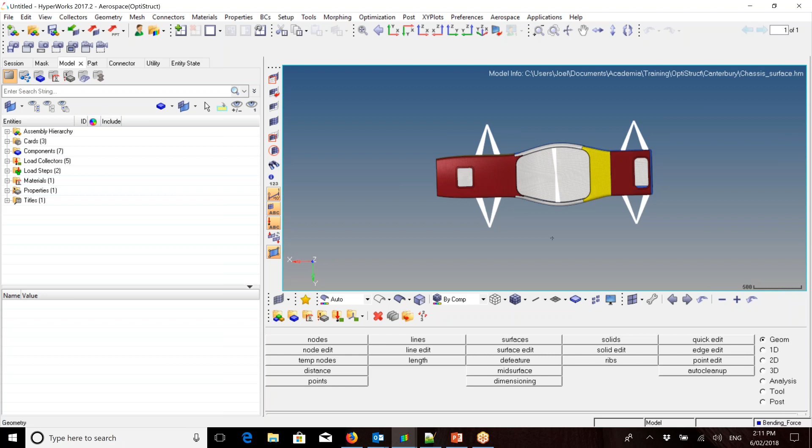So what I have here is just a generic model of a FSAE car chassis that was kindly donated by Canterbury University. So they've actually given one of their older models for me to be able to demonstrate here. So what's already set up is we'll just quickly go through it. So remembering from yesterday, panning around, control, left click, and we'll zoom in on it.

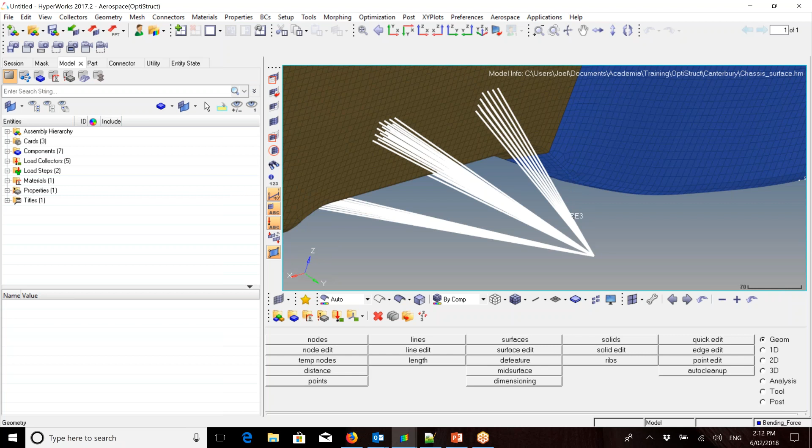So as you can see here, where the axles would be, where the wheel is joined to the car, we're using RBE3s, not RBE2s, because we've got to transfer the load. So if you remember from yesterday, the RBE3 transfers load and RBE2 transfers stiffness. So that's already set up there as if, on the ends of each of these rigids, we would have wheels.

And you'll also notice in the center of the car there, we've got another RBE3. So that there is to transfer the bending force through the chassis. So for the setup of this, it's quite important that you get your constraints right. So what I'm going to do is I'm actually going to go through the constraints of this.

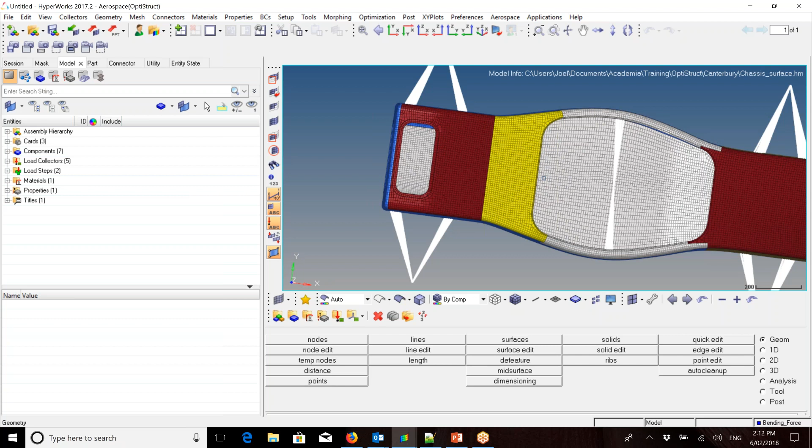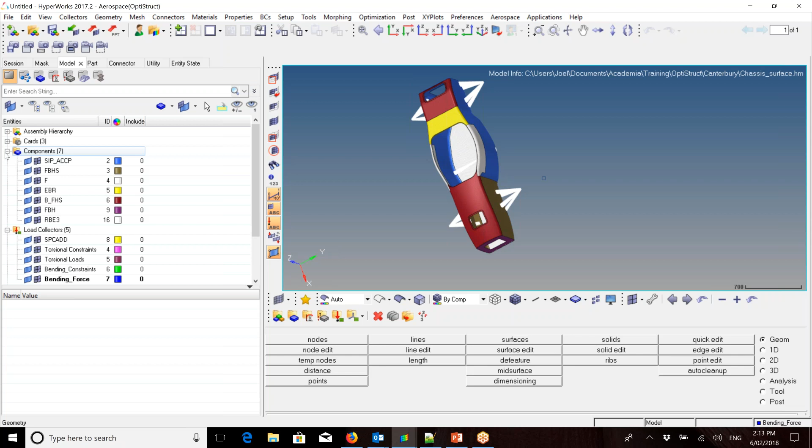Okay, so for the torsion test, you'll notice that I've already got my load collectors set up and split out, as well as my load steps. Not to worry about the components, as this was a carbon fiber chassis which I transferred to a simple aluminium metallic chassis. So in the load collectors, we're going to set up our torsion constraints first. So we're going to make that one current.

Now with the constraints on an RBE3, you can't directly put a constraint onto an RBE3. So what we have to do is create a bush in between, and we can create that rigid. So we can make a rigid bush which has extremely high stiffness. So it is basically like we have the constraint on the RBE3, but to the program we technically don't.

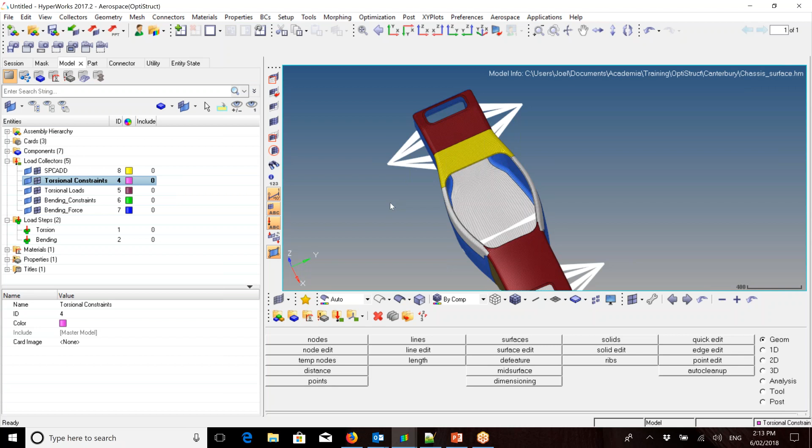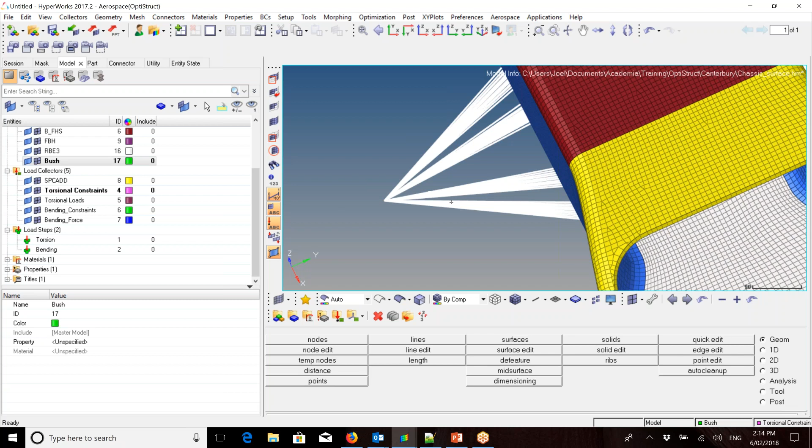So what we do for that is I'll create a component for this. Create component bush. Make sure that's correct. And we're going to put this on the rear of the car for the moment. So we also need to create some nodes and translate them out. Now this can be done simultaneously with both sides, so it's always handy to do that, because with the bending we are going to have constraints also on the front of the car.

So what we'll do is go to geometry, create nodes on geometry. Create geometry, create nodes. Sorry guys, I just lost my train of thought. Sorry, go to mesh, create 1D elements, springs.

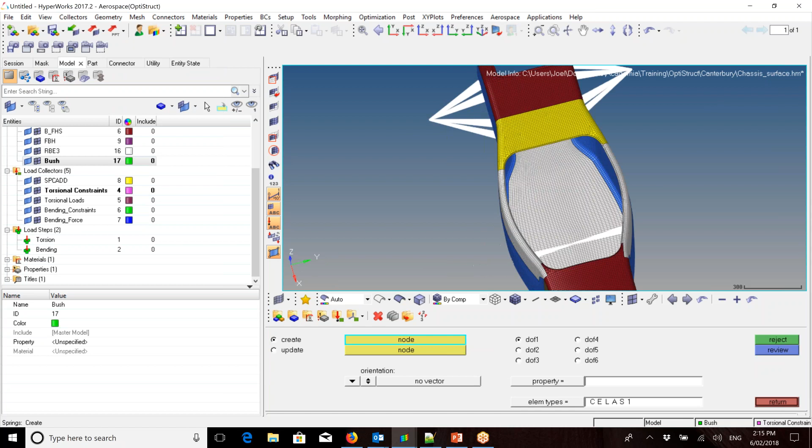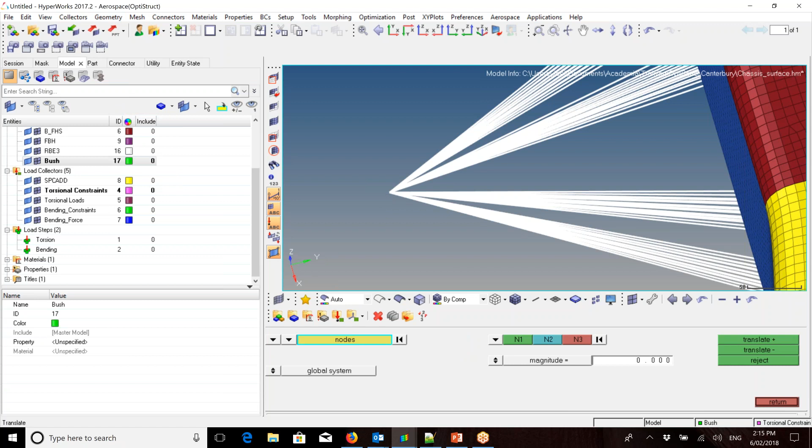And now what we've got to do is we've got to duplicate and translate a node, but this is where we would create our bush. But first we're going to translate the node from here outwards. So geometry translate. Sorry, that was what I was meaning to do before. Now, we're going to duplicate the nodes. So we need to select the nodes that we want first. So I'm selecting all to one side. Just put that away. Then you click on the nodes box and you can hit duplicate.

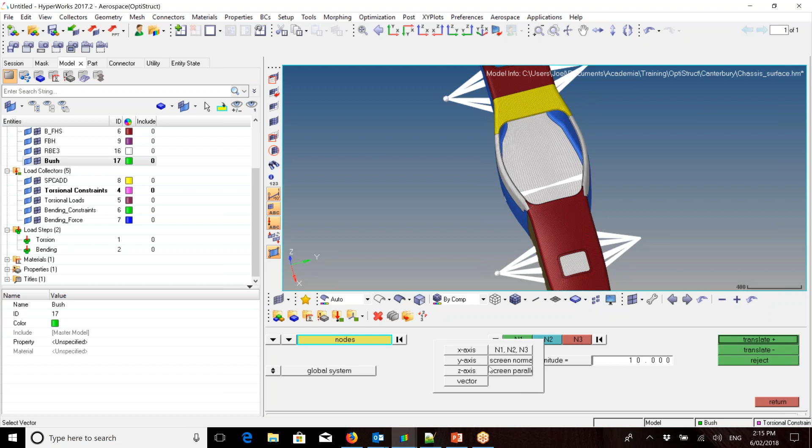Now for this, we're just going to translate the nodes out, say by 10 units. And we're going to put that on the y-axis and we're going to translate that negative. And we can see that's just slowly moved out from the axle. So if we zoom in there, we should now have a gap there.

And what we're going to do now is we're going to clear those. So by pushing this arrow, we've now cleared those nodes and we're going to do the same on the other side. Select both the nodes, but this time it'll be a positive translation and they've moved out too. So then we return out of there. Oh, sorry. Just have to do that again.

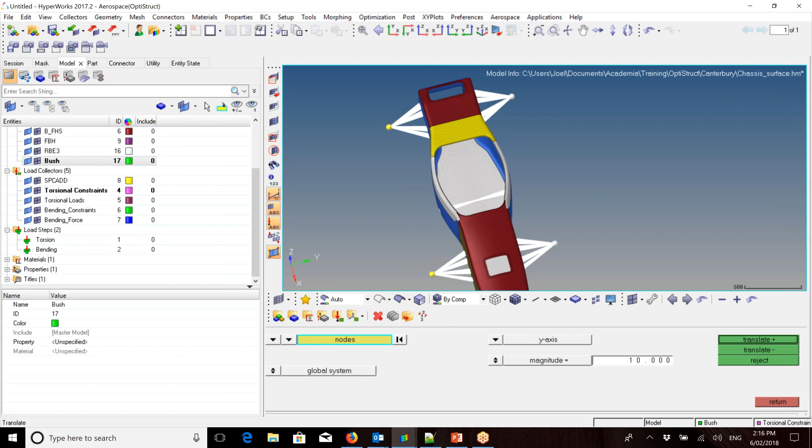Translate. Just make sure they've moved. Sorry, that's why I didn't duplicate. So duplicate, always remember, it's very easy to mess up. Then translate, now return, and now we've got our nodes there. Perfect. Okay, so we're going to create our CBUSH or our bush.

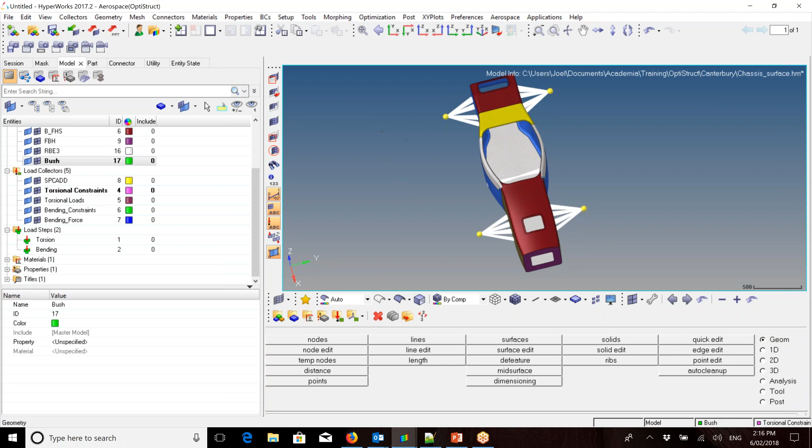So we go now to mesh and we create 1D elements. And this is going to be a spring. So we click on the springs. And first things first is change the element type to a CBUSH. Okay, and now you select the two nodes that we want. So we're going to go around and go node, node, and now we can see that it's green.

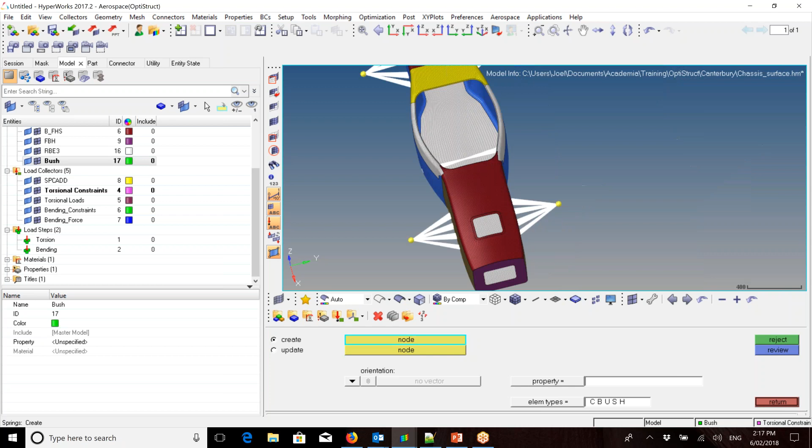And then we go down here and we do them all. So all the nodes that we've just created, we're going to create a CBUSH element between the two. Okay, so now once that's created, we do need a property for this, but we'll create the property now. So create property, and we'll just call this the bush.

Okay, so for this, we need to change the card image from PSHELL to a PBUSH. Yes. And then select the K line, and then you just select K1 rigid, all these. So this makes it a rigid bush now. So this gives you a rigid connection onto your RBE3 element. So now we then assign the property to the component, and that's done.

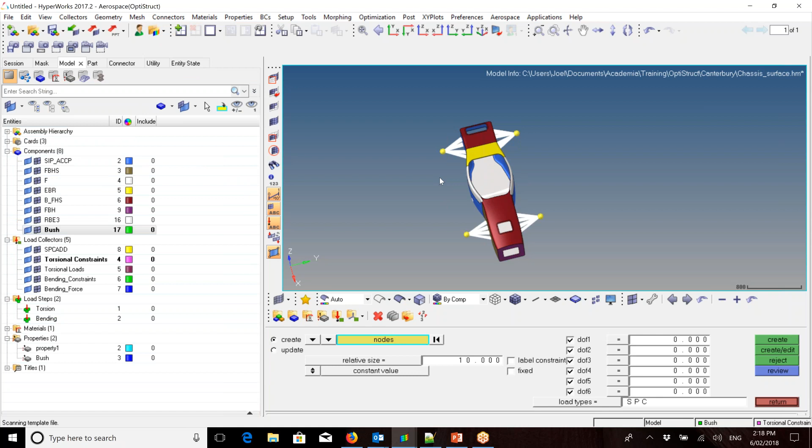So now what we can do is we'll apply our constraints. So we'll do our torsional constraints first. So for the rear, we're going to make sure that's highlighted. We're going to go boundary conditions, create constraints. We're going to select our node. We're going to zoom in. So just select one at a time. Now for one side of the rear, you're going to constrain it in the 1, 2, and 3 degrees of freedom. So it means it's not going to translate in X, Y, or Z, but all rotations are open.

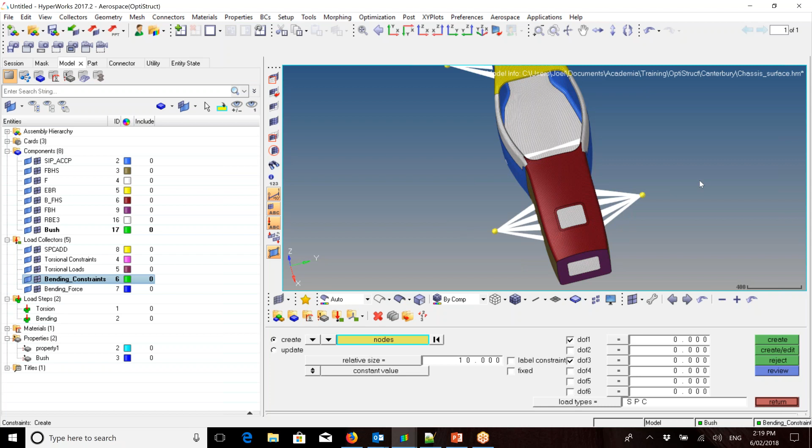So we create that. And now we go to the other side, select that node, and then we only constrain this in the 1 and 3 degrees of freedom. Create. Okay, so while we're still creating our constraints, we're going to then make our bending constraints current. And for the bending, all you want to do is have it constrained in degree of freedom number 3 on both sides. So we select our node, just degree of freedom 3, create. Then the other node,

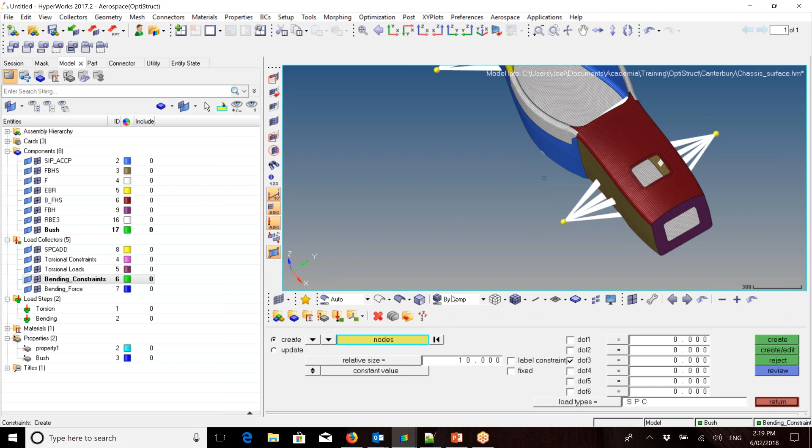create. Okay, so the reason why we only constrain this in degree of freedom 3 is because that is the translation in the z-axis, and with bending, that's the only movement we're going to have with that load applied. But you still want to allow all rotations. And so now our constraints are done.

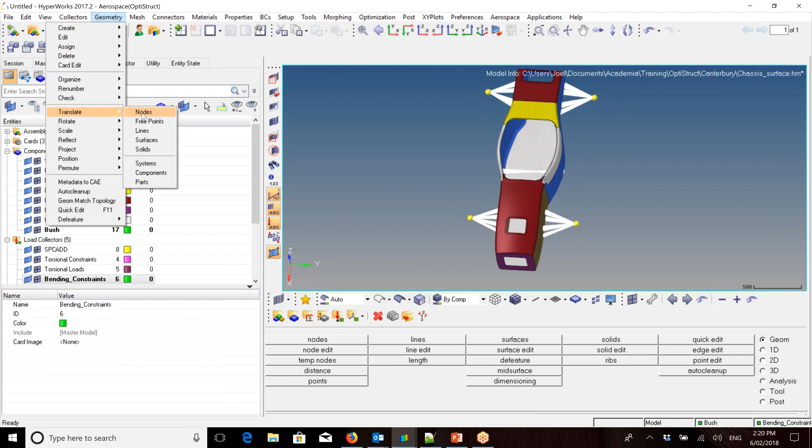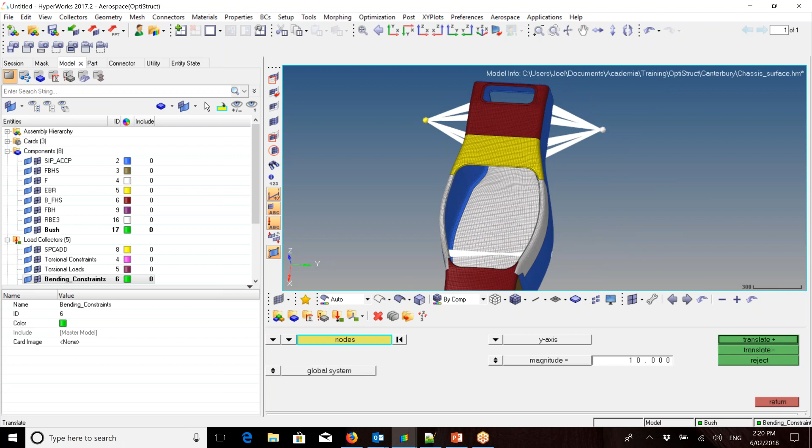We'll jump out of that, and now we can retranslate these nodes back to the axle. So go back to geometry, translate nodes, and now we can click on the nodes we want to translate, and now we just do the reverse. So where we did a negative translation, we'll do a positive translation for those two. Now we've put them right onto the axle, and then clear those, and then we select the other two sides and do a negative translation, return.

Now you can, if you want, clear these nodes. You can go geometry, delete, then nodes, and you can just select your nodes if you want. For this, we'll just leave them on there, but you're more than welcome to do that as well.

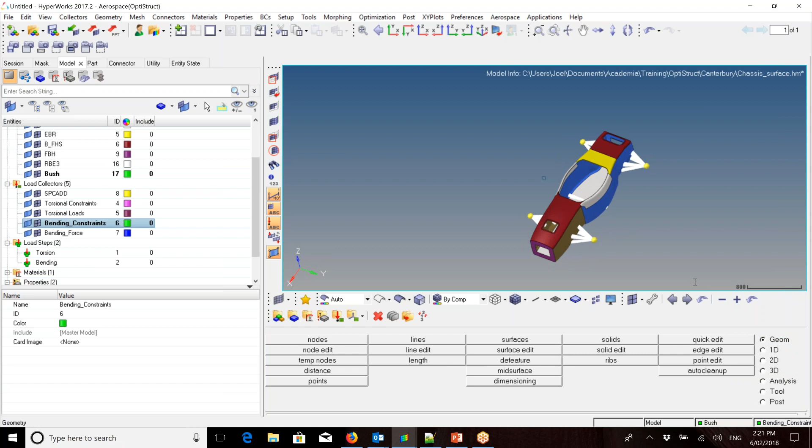Okay, so, oh, hang on. Sorry guys. Yeah. Okay, so just to make sure the audio was okay, we just had a quick pause.

So, what we're going to do now is apply our loads. So we're going to make our torsional loads current, since we're going to apply this first. So with this, when we do the torsion and bending test, all we're going to use is 1 Newton of force. Why that's really good is because this is a linear analysis, so you're then able to scale up the displacements found.

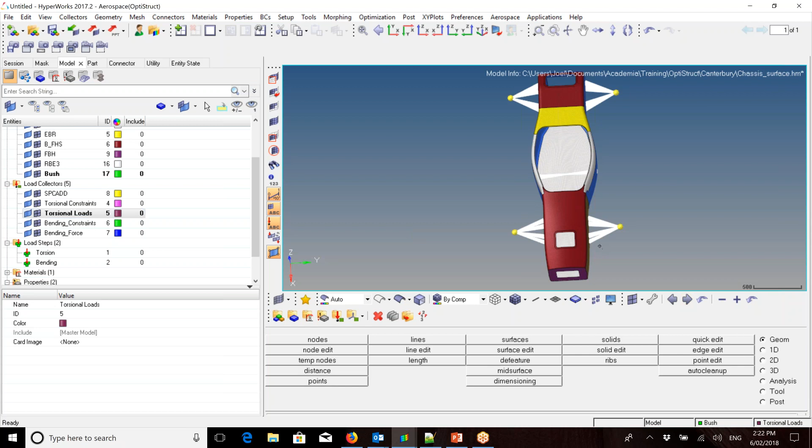Yeah, sorry. So what I've actually forgotten to do as well, sorry guys, is you've got to set a system for the bush.

So we're going to go into tools and analysis systems, and then we want to select our nodes or assign set to nodes.

Hey guys, sorry, I'm just gonna take over for this for a quick second because I've only just showed Joel how to do this, so I'll show you guys as well.

So because the C-bushes are 0 length now, they don't have an axial direction defined, which would usually be the one axis. So we need to define a coordinate system for them to use. So what we do is we go to card edit, this little icon here. We choose elements, and we choose the config type to be a spring, and the type is a C-bush. So it's a C-bush, and then we click edit.

Oh, sorry, we need to select them by config as well. So we go spring and C-bush, and then they select all of the C-bush elements. So you can see down here it says 4 elements added. Then we can click edit. And you can see some of the entities that are different between them. So the element IDs are all different. GA and GB are the 2 nodes that are connecting up, so they're all different, but the property is the same for all of them.

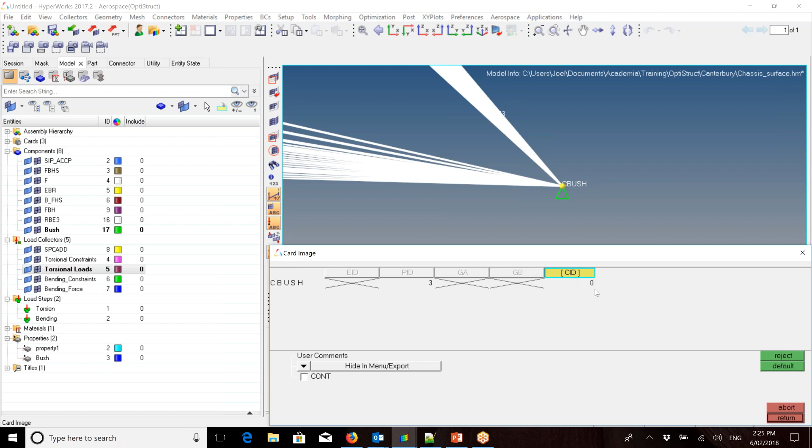So in CID, if we set 0, then that just tells it that we're using the global coordinate system. So we can just return out of there, and that assigns it. So you can basically see the global coordinate system here in the model. So if everything's aligned to that, you can use the global coordinate system. But otherwise, you can define your own if you want to.

Okay, I'll pass it back to Joel for the rest of the demo. Thanks, Alex. Yeah, sorry about that, guys. So that is something that I'm actually just learning now. So as you can see, even myself still learning with it all. But yeah, so hopefully that was clarified.

So when we translated it back, so it's got a 0 length, you do need to set up the coordinate system with it. So that's what Alex was going over there, just to help me out. So we'll go back to setting the load.

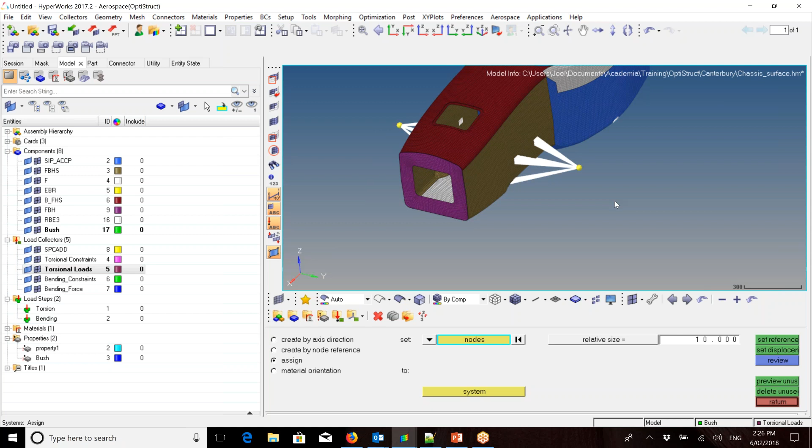So as I was saying, we only use 1 Newton loads because it's very easy to then, in a linear analysis, scale it up, and then the scale can be multiplied by the amount of that. So if you use 1 load and you do a scale factor of 10, you scale the displacement by 10, and that's what you should roughly see with a 10 Newton force. That only works with a linear analysis. If you're doing non-linear, you can't just scale in that way, to make that very clear. So you need to be very careful with that.

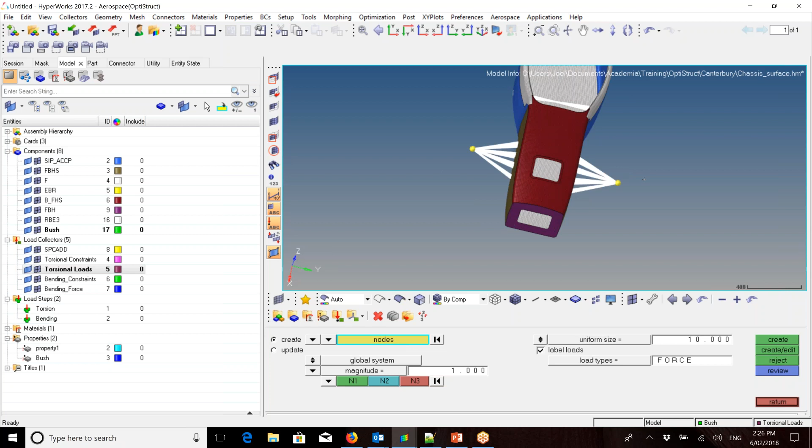So we'll return out of there, and we're going to go and create boundary conditions, create forces. So all we're going to do is create an up and down 1 Newton force on either side of the front end. So we're going to change from the vector to the z-axis. Select one side, 1 Newton, create, then select the other side, give it -1 and create, then we return out of there.

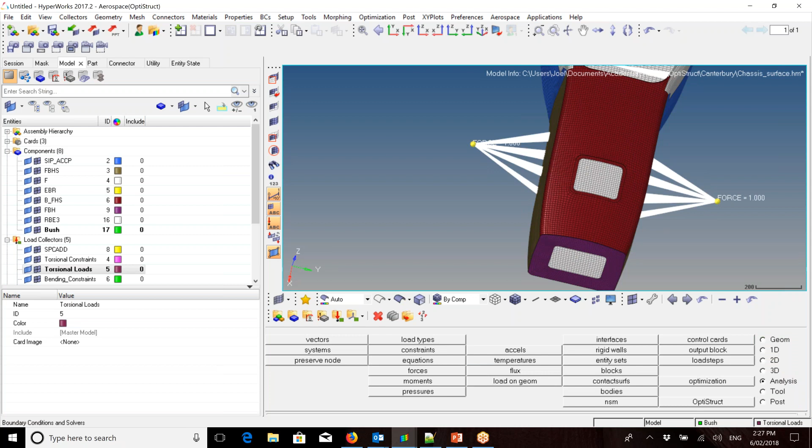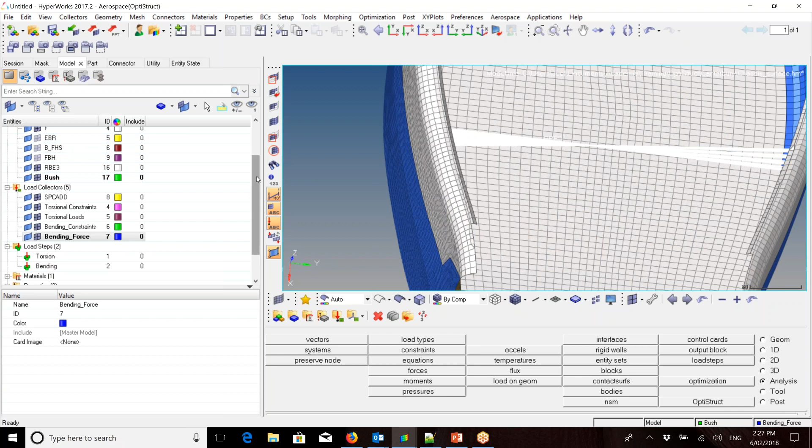And now we're going to assign the bending force. So we make the bending force current, and we're only going to apply 1 Newton in here. But to make sure you actually get the right node, what we can do as well is hide components. So we're going to hide all the elements just to make sure that we select the correct node here. So now we've only got our RBE3 showing in the middle.

Boundary conditions, create force on the node. So now we've definitely got that one, and that's going to be a -1 Newton force downward on the z-axis. So then we create that, return. Okay, so we've got all our loads and constraints created.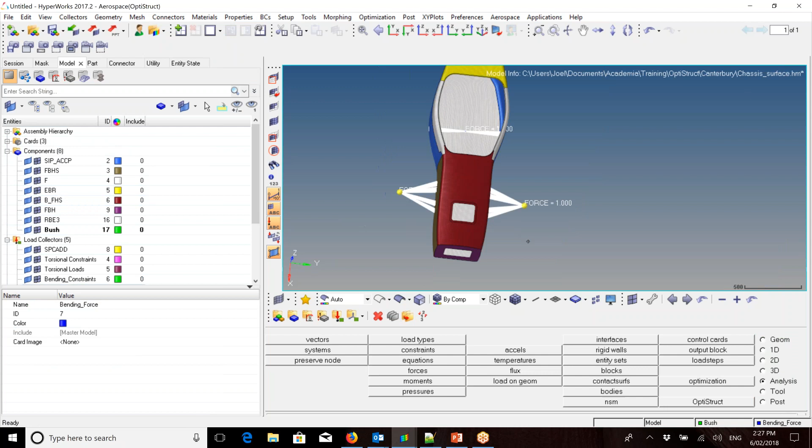Now, what we need to do is in the load collectors. So for the torsion, it's very straightforward. All we need to do is create a simple load step, call it torsion, and add in a linear static analysis type. Your SPC will just be your torsional constraints, and your load will be your torsion loads.

However, in the bending test, because now we want to keep the torsion constraints, but we also want to add in the bending constraints, what we do is create a load collector called SPC add. You create the collector, then change the card image to SPC add. This is how you add constraints together.

If you have 5 constraints that you want to run with the same load, you create an SPC add card and type in the number of constraints. For ours, we're only adding 2, so type in 2, hit the data set, and this is where you choose which ones. I've opted for 2, added in the torsion load collector, selected that, then added the torsional constraints, and that's it.

So now we've added the 2 sets of constraints, and this will be able to go to the bending load step. Instead of adding bending constraint or torsional constraint for the SPC, we add in the SPC add load collector, and for the load we just have the single load, the bending force. Does this make sense to everyone?

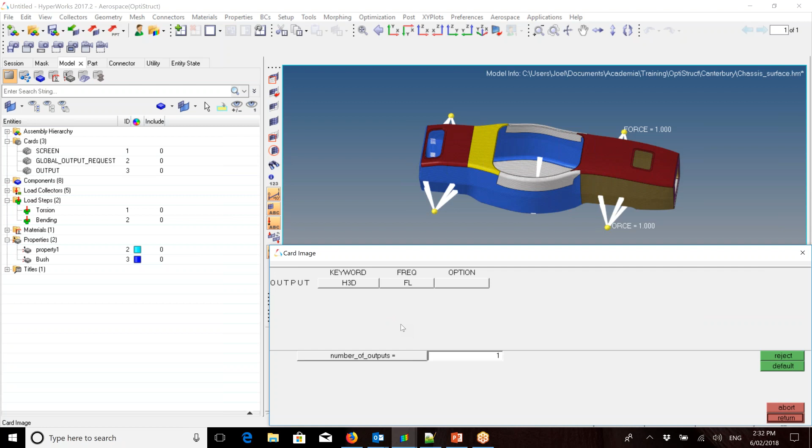Like yesterday, return out of there and that will automatically come up. You can also go to output, which is further along, and in output you can select how you want it. I've just asked it as H3D. I don't want that many outputs, so you can change that to just one output, number of outputs, then change the keyword again to H3D - that's your standard output file for Hyperview. We want all frequencies, so everything. You can return out of that.

Now you're ready to run it. So you click on OptiStruct, save your .fem file into the location you want. If you can, put in your -nproc 4, so number of processes 4 - you don't have to do that though. Then you would hit OptiStruct and run the analysis.

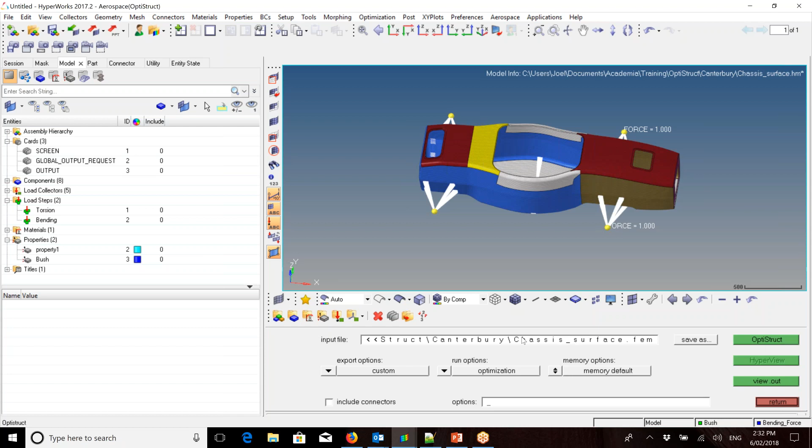Once, and this is another thing I was hoping to show yesterday but ran out of time, the analysis is completed, you can open up the .out file in any text editor. This is also a look at what is running - you'll get a screen that'll be running down as it's performing the analysis. This is where in the optimization runs as well, you can go and have a look at the .out file and see how your objective has changed.

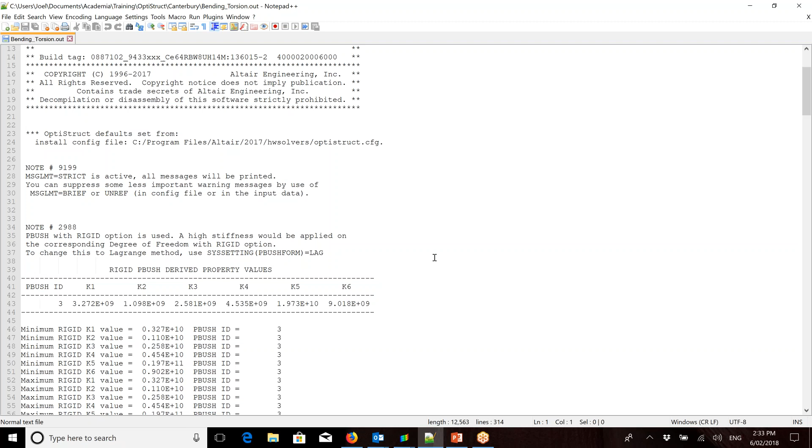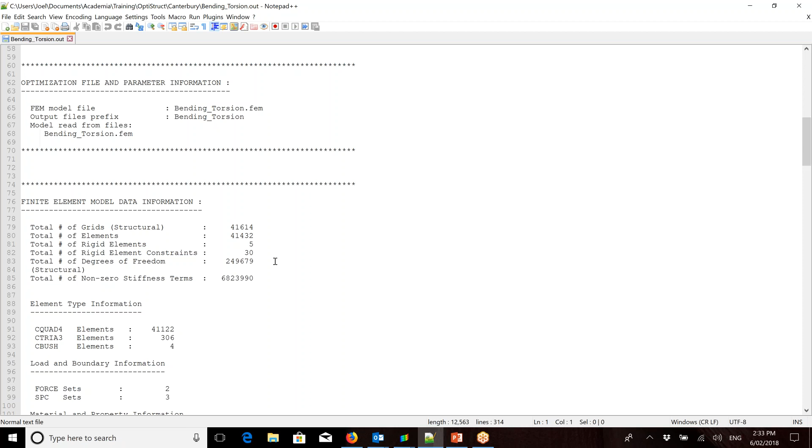So this is where you can view the mass changes. But for this one, we're not running an optimization, so we're going to be having a look at a few different things. It tells you number of elements, number of rigid elements, constraints, degrees of freedom. This gives you an idea of how long this can take to run, like how many equations you're going to have, because every degree of freedom is going to have an equation. You've got your sets, types of elements in there as well.

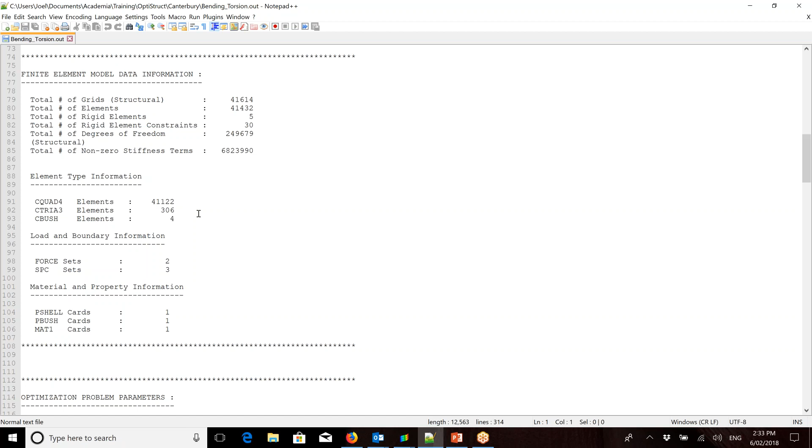If you've got this set up as a full model and you don't want any shell elements, you can come in here and see you've got shell elements. So then you're able to know, well, hang on, what's going to be given to me may not be correct. So then you can stop it before waiting the hour for your run to finish. You can stop it, get everything set, and then go again.

That sets up all your parameters. So you guys, when you run your analysis, I recommend definitely going through these and understanding what's coming out, just so you have an idea. And then it's got analysis results, and that'll show that.

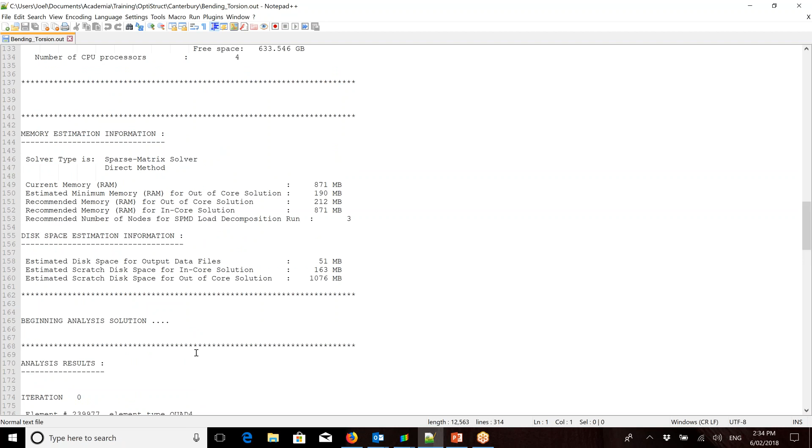So then we open up our H3D file, and from this, what we can do now is, this is where the outputs come in with the result type. Click down, and now you can see we've got our SPCF, forces, moments, elements, strains, and it will tell you the 2D and 3D stresses, but also our element strains and stresses in our 1D elements, which are our rigids. So that also outputs for them.

So make sure that you do know which elements you're looking for. If I'm looking for stresses in the 1D, I've got to make sure I select this one, not the 2D and 3D ones. But for the start, we're just going to have a look at the displacement of the torsion. So we're going to apply that.

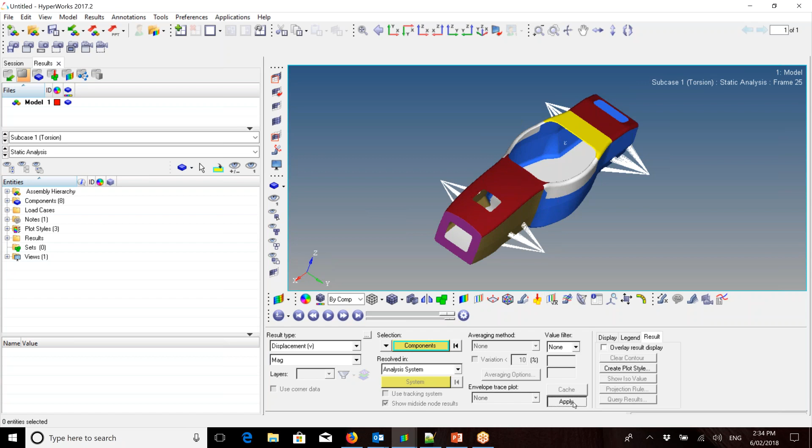Now we can see how far this is moving. So we should be able to set the animation, just having a quick look here. We'll keep it at linear, but one way to do this, because it's linear, it's not moving much, so what we do is up the scale. By clicking the little bar with a red arrow going down, we can change the scale to say 100. As you can see, it still hasn't changed a whole lot, but we did see it slightly move.

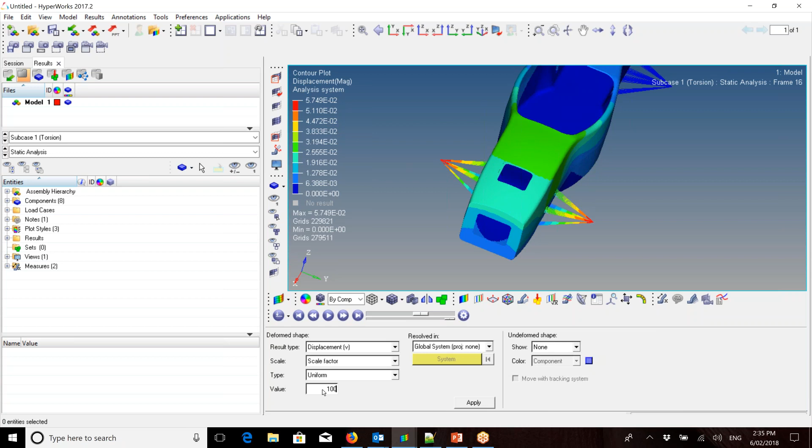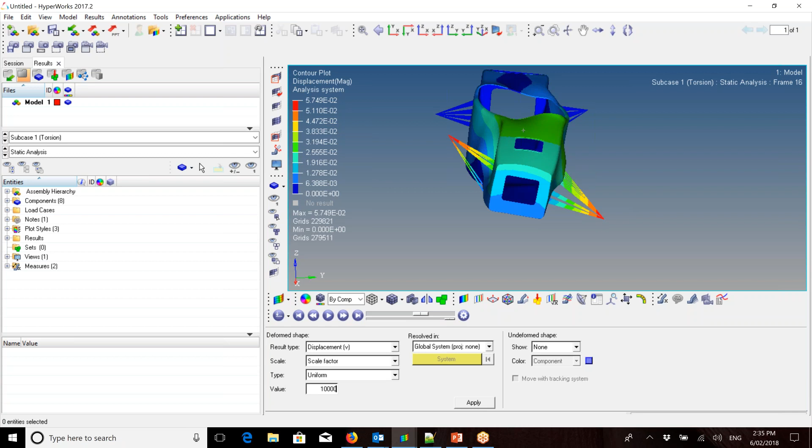So we're going to make it 1,000. Now we can start to see only very slightly. This would be now 1,000 newtons applied in this way. So let's put it up to 10,000. And now we can see the displacement and what's actually happening within the chassis and the warpage. We can see large displacements here and some really big warpage and shape change happening within this area.

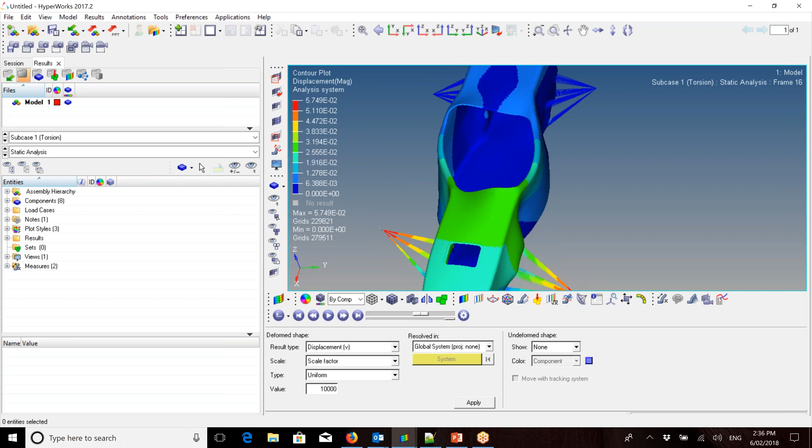This will give you an idea of where you need to be applying stiffeners, where the stiffness is lowest in your chassis, so where you can increase this. We can see here, if you can tell where my cursor is, where we've got the up force, we had it on the other side, in that little corner on the join, is where we're seeing a huge amount through this area here. It's also the same, a lot of change within that thinner area. So we know that we may need to increase the stiffness there, but that's also at 10,000 newtons up and 10,000 newtons down.

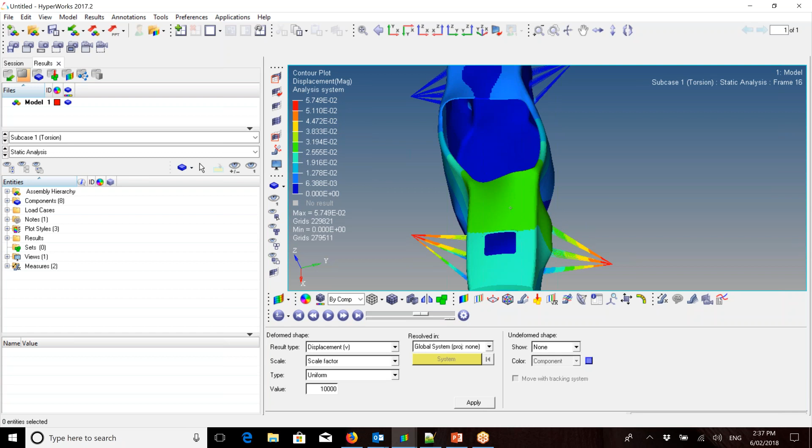Whether the chassis will ever see that much force is also a different thing, but that comes down to your engineering judgment and also some of the constraints that the FSAE will put on for their testing as well. If the FSAE has their own test that they expect you guys to run, set the model up how they've told you to do it as well. But if they don't, if they've only told you just the force to use, then it's good practice to set it up like how I've shown, but use the force that they've told. Making sure when you do this, you are conforming to either how they lay it out, or if not, always go with a 1 Newton load, because it's very easy to scale up or down should you wish. Okay, so that's our torsion.

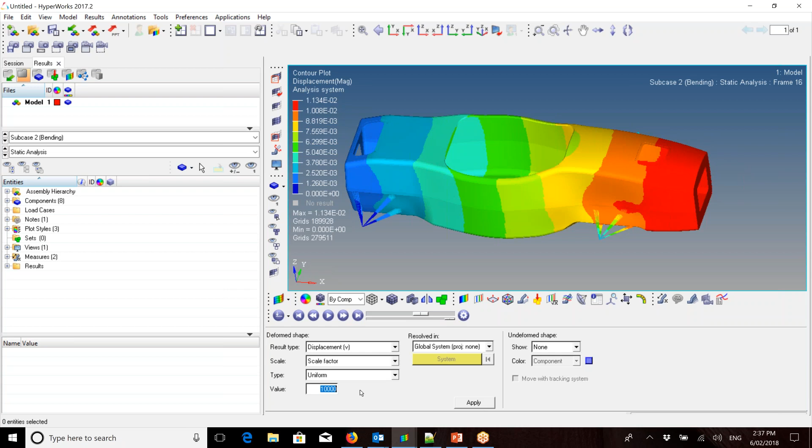Now what we're going to do is we're going to change the subcase to subcase 2, which will be bending, and we're going to apply that. So we don't see as much shape change here, but what we can do is increase this from 10,000, let's put it up to 100,000 newtons.

Now we can see some serious change. As that 100,000 newtons is pushing down, our constraints are holding, and we can see a huge amount of warpage within the side wall here.

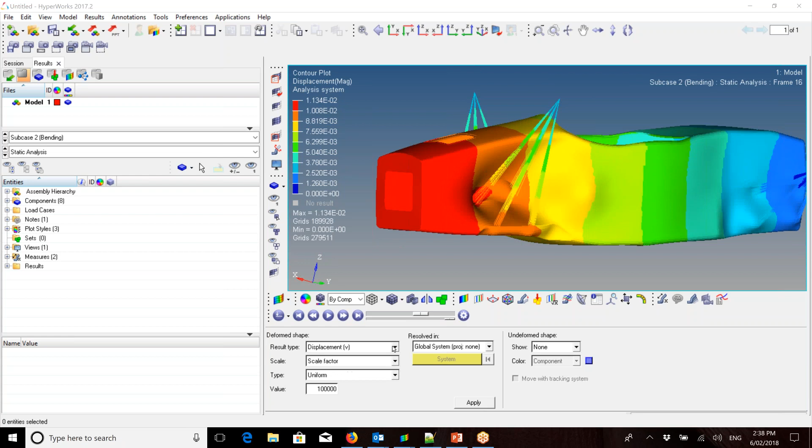And there will be a lot of stress in there as well, so we can always change that. Go back to contours, and you can always change that to stresses. But this is the displacement, so this is at a scale factor, remember, and that's what we're seeing there.

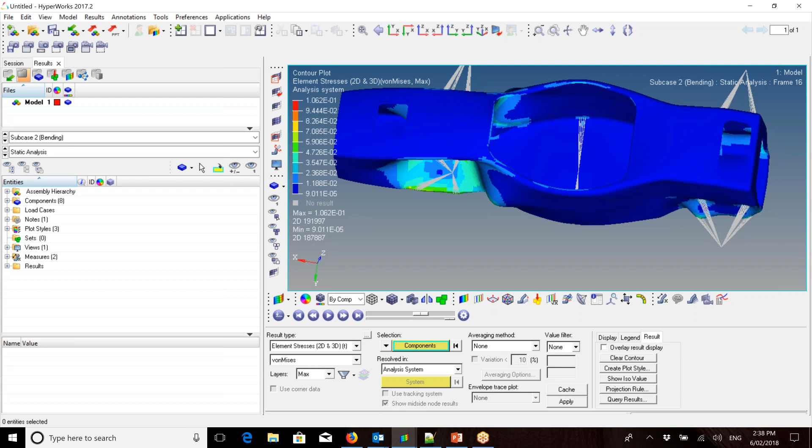So again, with the bending, if they tell you to use 100 newtons downwards, do your analysis with 100 newtons downwards. Or if they tell you to do it with 1,000 newtons, use 1,000 newtons. But if that's not laid out, it's always handy to start with a 1 Newton base load. It's just like when you first run a CFD analysis, always run a flat plate compared to starting to run your wing, so you've got base results to compare to. It is very much like that.

But again, if they're telling you to set your model up one way, set it how it conforms to the rules laid out by the FSAE for the competition. So yeah, sorry about taking up the time today, but this is what I was hoping to get through a bit more yesterday, but we were running out of time.

So is there any questions with this, and sort of what's actually happened here and why you would do this? Does anyone have any questions with that? Feel free to speak up, because I'm more than happy to stay around for another 20 minutes if you do have questions, so it could be a good opportunity to.

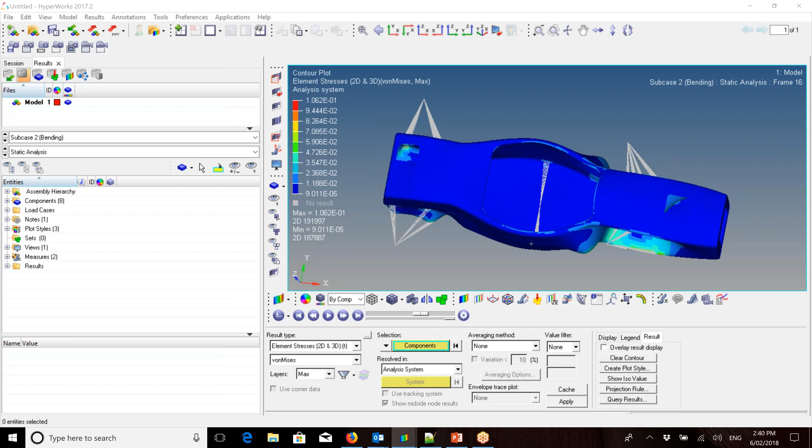Hopefully by now, at the end of the third session, guys, if you are new to CAE, you're starting to see a real good benefit as to how you can implement it into the designs, and how you can start to use this within analysis as well. Or also if you have been using CAE for a number of years, hopefully I've been able to show you a different way of looking at things, and you're starting to think about more advanced techniques such as proper mesh correlation, and you've been able to go through some of the tutorials online, and you're starting to get a bit of a handle, hopefully, on the programs. But yeah, look, if there's no questions there, I will leave it there.

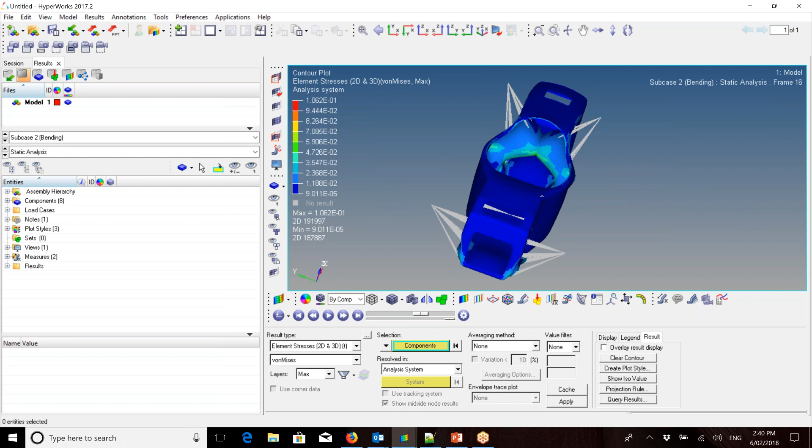So this is just a good generic way of setting out your chassis torsion and bending test. A bit about control cards, so you can start to pull out the desired outputs, not just defaults. And hopefully this is starting to help give you a bit of an idea about how to do some post-processing as well. So definitely have a play around with all the different things, like your ISO plots, different contours, what you can view, different types of analyses, and just seeing how you go there. So always check out the tutorials in Altair University, because there is a heap there.

Oh, okay, perfect. Yeah, that's a good question, Ben. So this process of actually doing it won't change between composites and metallics, but more the actual setup of the material and the property will be very different. In a later date, I'll be going through how to set up a composite model, and going through the layers and the plies. So in terms of running the actual analysis, it's the same, but the actual material and the properties created for your analysis will be very different. Does that answer the question?

No worries. So yeah, that's a very good question, because sometimes things with composites will differ dramatically from metallics, but in this case it won't. It's just going to be the actual setup of your model, not so much the setup of your loads and load steps. So what I'll do is I'll stop the recording now.